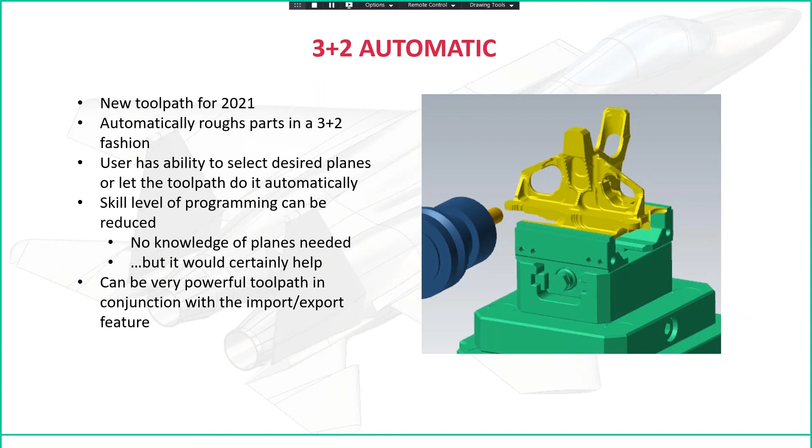Let's take a peek at some of the results we're seeing here. We're going to take a look at this exact model inside of Mastercam in just a second, but here's when I let Mastercam figure it out automatically for me. Looks pretty decent, but we have a nice big hunk of material here that we still need to remove.

Here is when I went ahead and gave it a little bit more planes. In this case, I just told it I wanted to come from specific planes rather than having Mastercam figure that out for me.

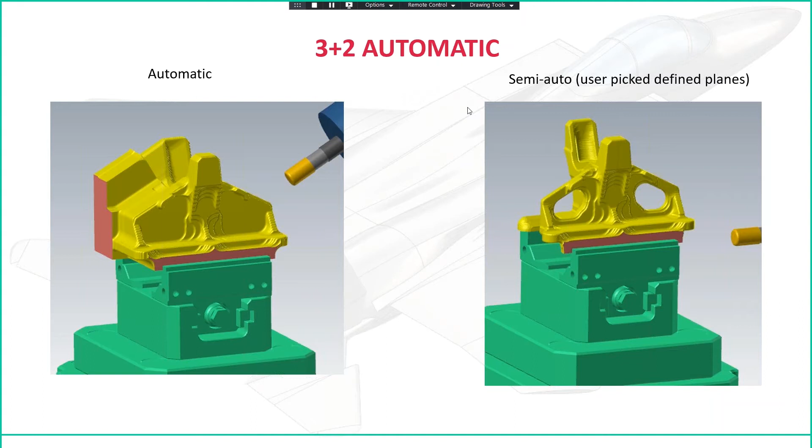The other usage we've been hearing for this too is you can use it as a rough shape to rough out. So if you're starting with a big chunk of stock, you can generate one of these models and rough out that shape instead - maybe as a better starting point to then go ahead and throw in some tools, knock down some more material.

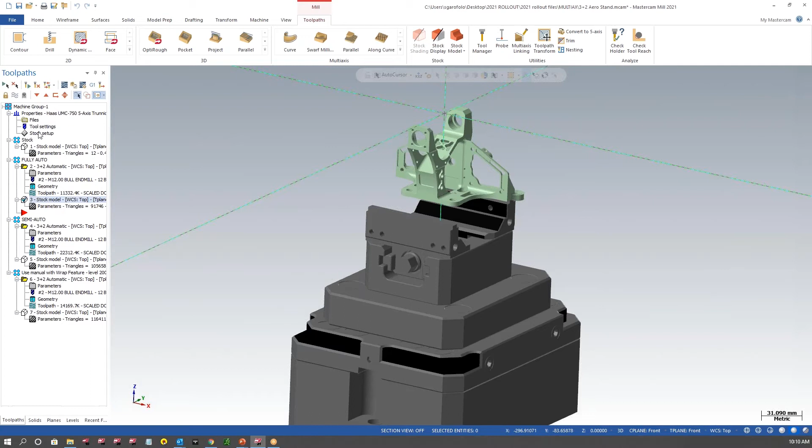The very first thing you need to do is either go into your stock setup and set up your stock there, or you can just create a stock model, which is what I did in this case. So this is what our stock looks like, just this nice block we have here. It doesn't matter whether you did that with a stock model or stock setup.

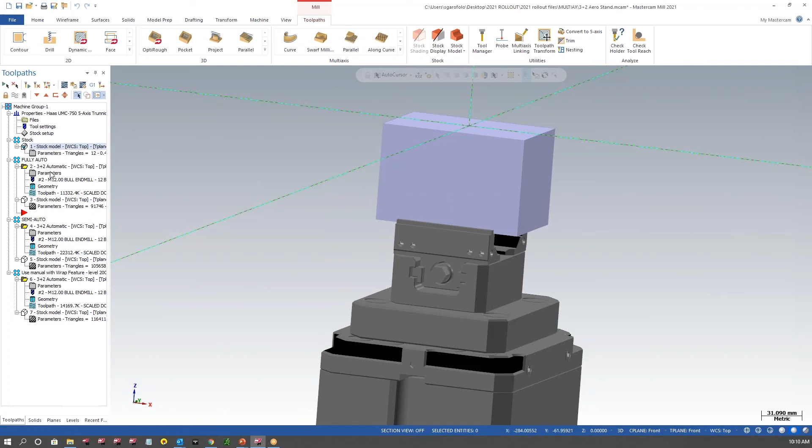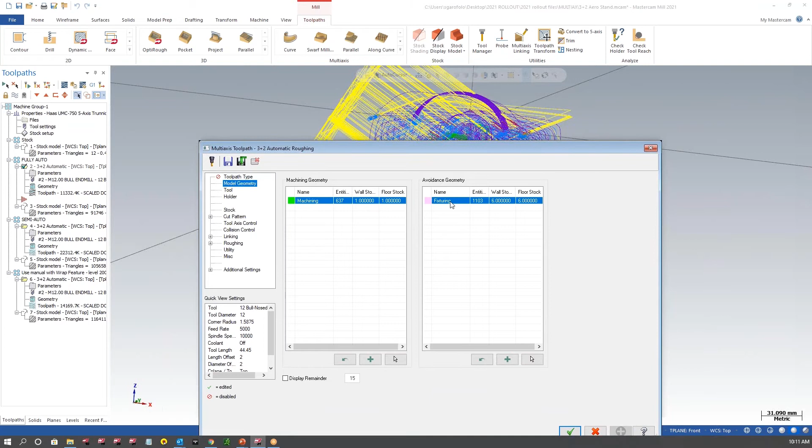After your stock is defined, we're going to go ahead and pop into the parameters. I'm going to go back up to the very first page here, which is model geometry. The one thing that should stand out to you guys on this page is that it looks exactly like a 3D toolpath. You select your normal geometry for machining and your normal geometry for avoidance, and it looks exactly the same as it would in a 3D toolpath. I think this is the only multi-axis toolpath that does that.

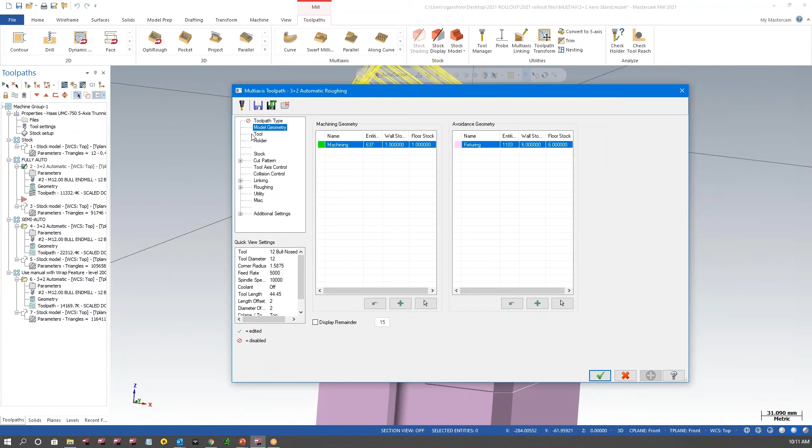But in this case, if you look on my screen here, what we're machining is the green model up top, and what we're trying to avoid are all these fixtures down below. Let's go to our tool page next, which is our 12mm bullnose end mill.

The page we do have to go to here is stock. So when I go to my stock page, I need to tell Mastercam what I'm starting with. In this case, I have it set to stock model, and I have it set to the stock model that I've created up here. You can also set it to job setup if you set up your stock in the stock setup page. So that's all I'm going to do on this page, just make sure I tell Mastercam what I'm starting with, and I'll move on to my cut pattern.

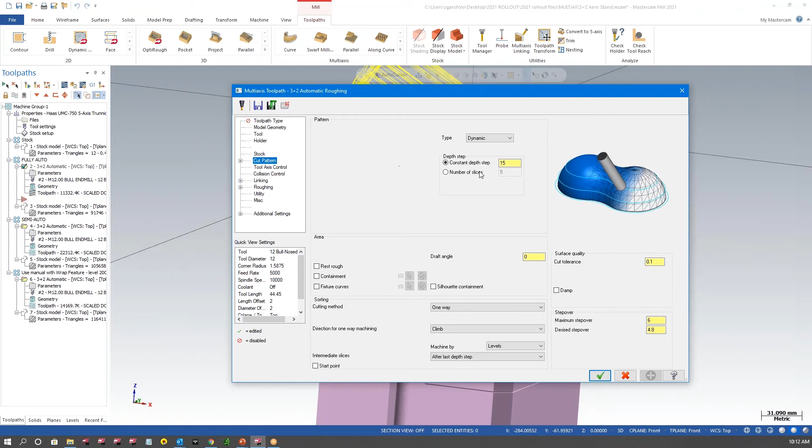And this is a pretty standard looking multi-axis page. Go ahead and set my depth step, how much I want to step down each time, and how much I want to step over.

There is one thing I wanted to mention here: the type is currently set to dynamic, and there's a bit of a caveat with that. That's actually not Mastercam's proprietary dynamic technology. It is something very, very similar to it, but Mastercam's own dynamic isn't quite yet into this toolpath, and there's a good reason for that. In coming revisions, we can expect to see Mastercam put their own dynamic in here, but this should work very similar to that still.

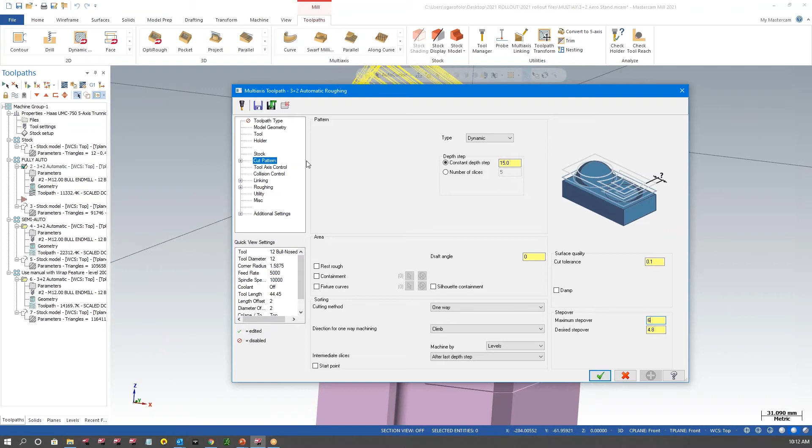All right, let's move on to our next page here, which is tool axis control. This is kind of the heart of this toolpath itself. This is what's going to allow Mastercam to either figure out the planes for you or allow you to go in there and tell it exactly how you want it to cut. In this case, we have it set to automatic, so I'm telling Mastercam to figure it out for me.

We have search angle increment, and this is used if you want to snap to specific angles, like 0, 15, 30, 45, instead of going to an angle of 22 point something or other. So how much increment do you want to snap your angles to? Max stock to leave needs to be larger than or equal to the value you have in the model geometry page. And max tilt range is how much this thing could tilt going from one of these planes to another. Currently we only have that set to 90.

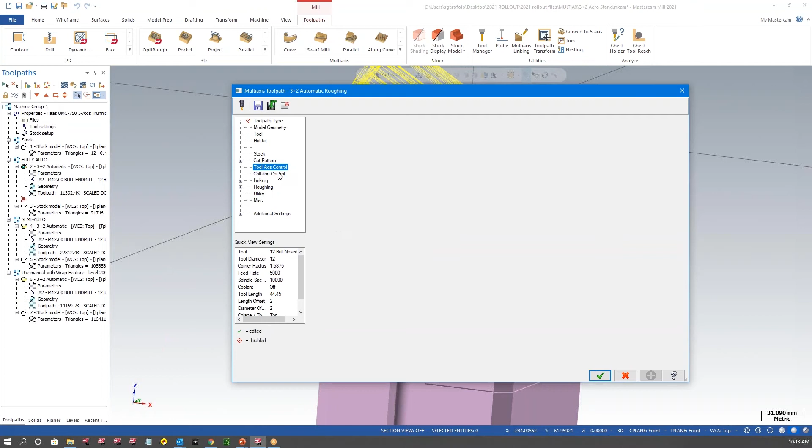Other than that, with this toolpath, there's nothing too earth-shattering. The next page is collision control, and this has clearances for your holder, shank, and shoulder, just like many multi-axis toolpaths would. Then the linking page is pretty standard too. We have clearance area set to plane, and that's the only thing you have the ability to set it to in this case. It'll always retract in the current plane that you're doing your machining.

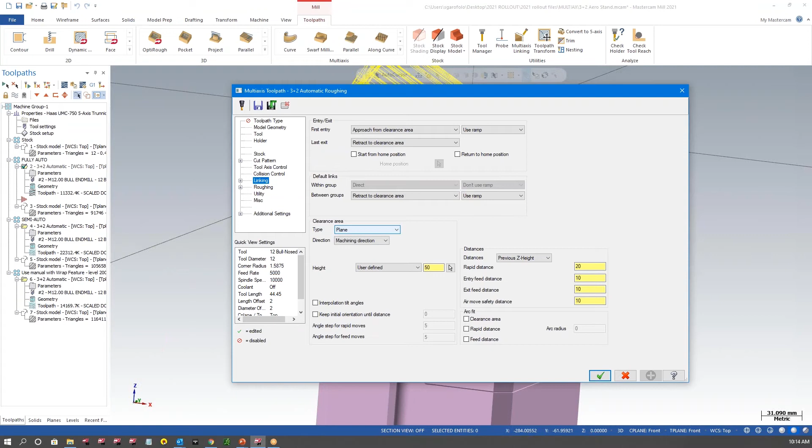All right, let's take a peek at this one. I'm just going to hit the red X so I don't have to wait for it to regenerate again. And I'm going to play it for you guys in backplot. I know it might look a little jumpy on the online session, so I'm just going to forward it through a little bit for you guys here.

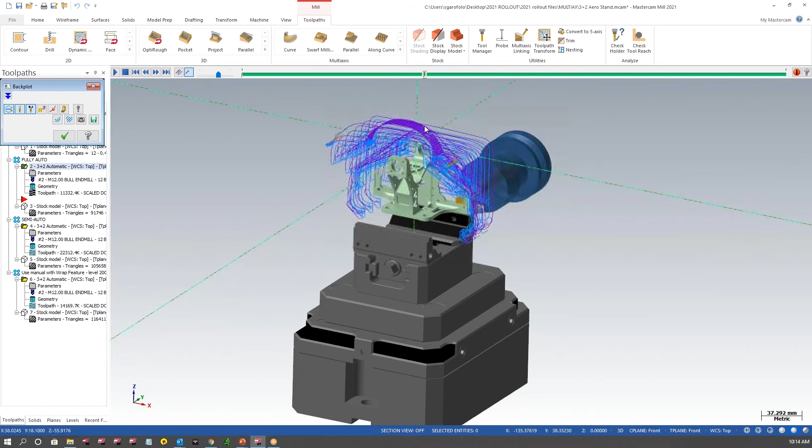As we can currently see, it's milling from, let's say, the back plane. And after it's done with that, it's going to transition to a different plane, and we'll get there. So now we transition to this 45-degree plane, and we're going to continue to machine in this plane. I'll just slide it all the way through here.

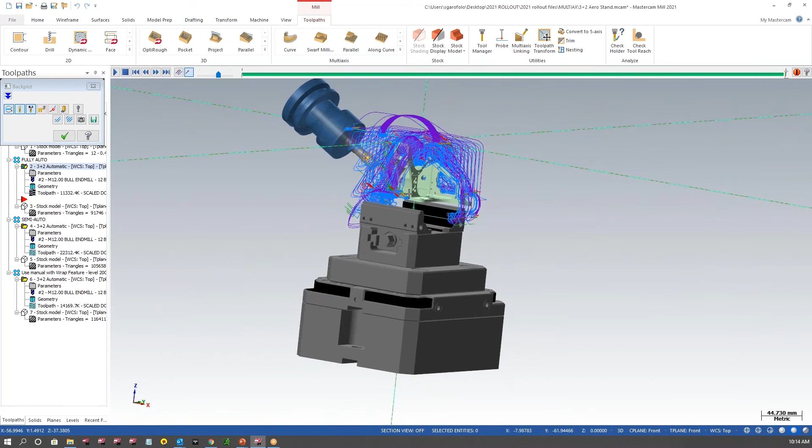One thing that I noticed right off the bat is it looks pretty decent, but the fact that I can see straight through to my model there lets me know that we missed a big chunk of material.

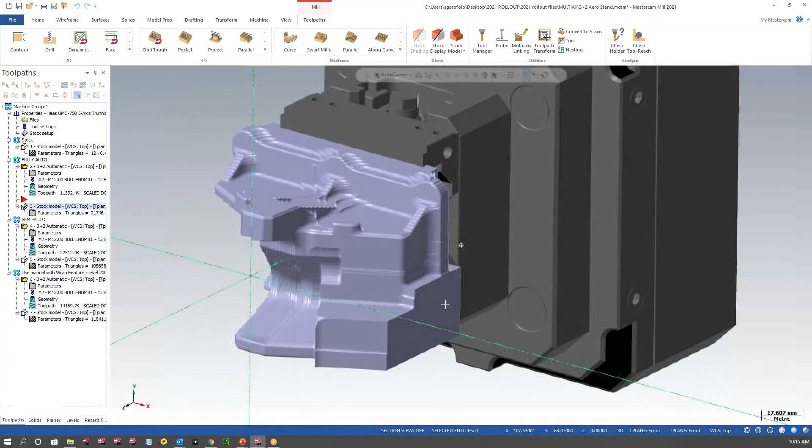All right, so that's what you run with automatic. This is what it ends up looking like. It's the same model that you guys saw up on the screen there. You end up with that nice big chunk of material. So let's see how 3+2 automatic works when we go ahead and give it some input.

I'm going to click on the next one here down to semi-auto. I'll go into the parameters and show you how this works. The only difference of this toolpath is everything's set up exactly the same. The only thing that's different is the tool axis control page.

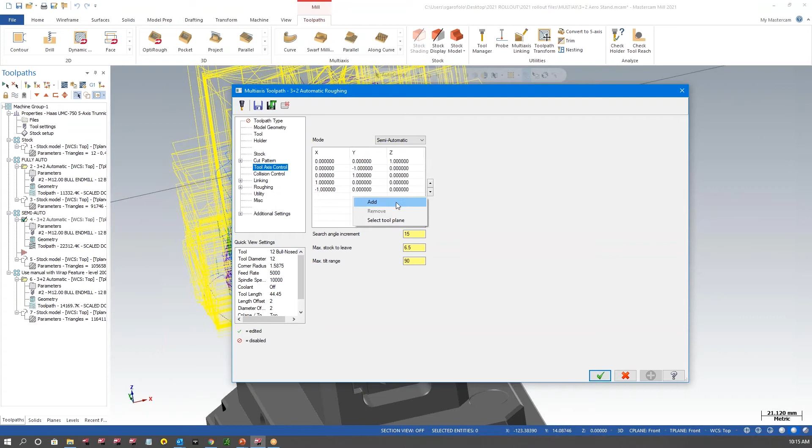We previously had this set to automatic. It's currently now set to semi-auto. So what we're now allowed to do in here is define the planes that we want 3+2 to machine in. So in our case here, if I want to add a plane, I can right click and either select add and type in the vector, or go here and say select tool plane, which for me is much easier.

When you go into select tool plane, you have a bunch of options, as you can see on this little select view. You can select either top view, front, side view, isometric. You can grab a named plane, which would include any planes that you may have created yourself. Or you can do some things on the fly here.

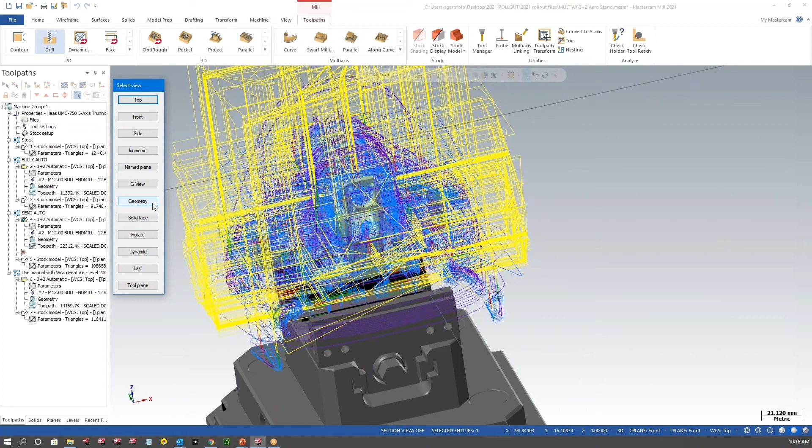We can do a geometry, solid face, and simply click a fixture or your model to generate a plane that you want to machine in. So in our case, I'll do something like solid face and turn off all these lines. Perhaps I want to go ahead and click on either a face of my fixture or a face on my model, and obviously it has to be a flat face.

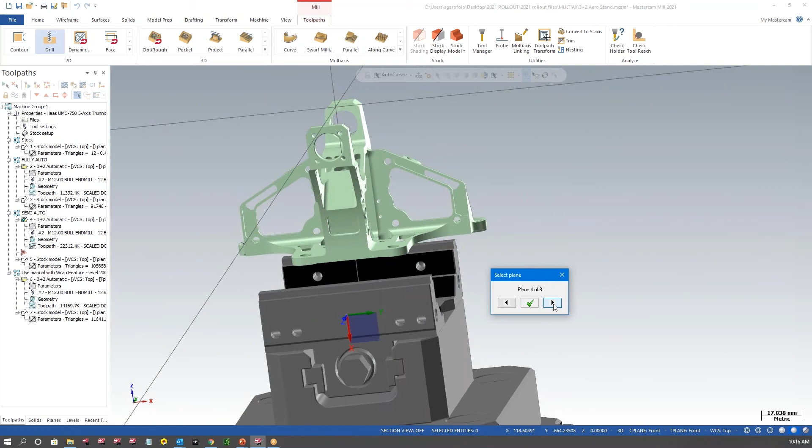I'll click this face on my fixture, and just like you could for normal planes, you can then rotate this thing around for how you want it to tilt in your machine. I'm going to go with plane 4 here, Z coming straight out of that. And then I've added that as a plane I want to machine in.

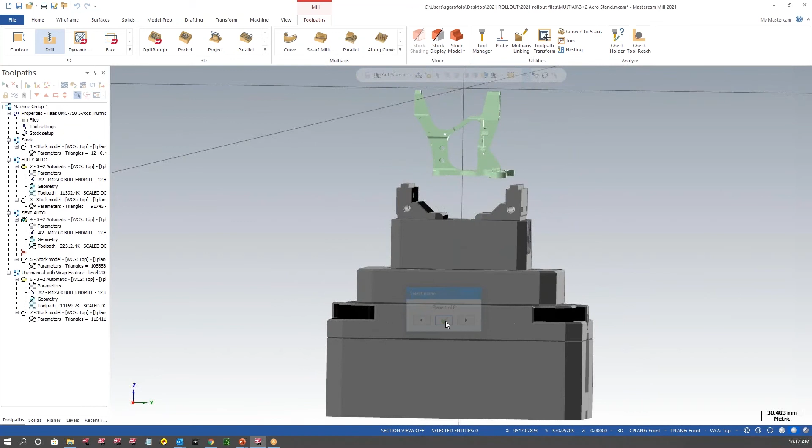Go ahead and add another plane if I would like. Do the same thing. I'll select solid face and rotate to another solid face here, and I'll add that as well. So you can add whatever faces or planes you would think would be most efficient to machine your part.

I'm not going to hit the green check. I'll hit the red X again so I don't add those in. We'll see what I did here. I think, once again, I came in from almost every plane, like 5 sides. I think I came in top, front, back, right, and left. And I think I could have easily omitted right and left and still got really good results.

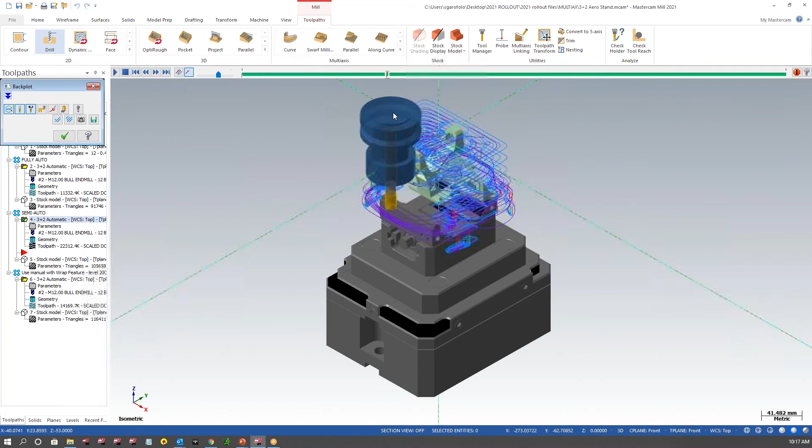So if I play this thing through, you'll notice it does all those things. It starts from the top, and then it will end up transitioning to a new plane coming from the front. And the one thing you'll notice if you're watching this is it's not spending a whole lot of time in those front and back views.

So it's doing rest machining. It's aware of what it's already cut. It's not recutting the entire model over again.

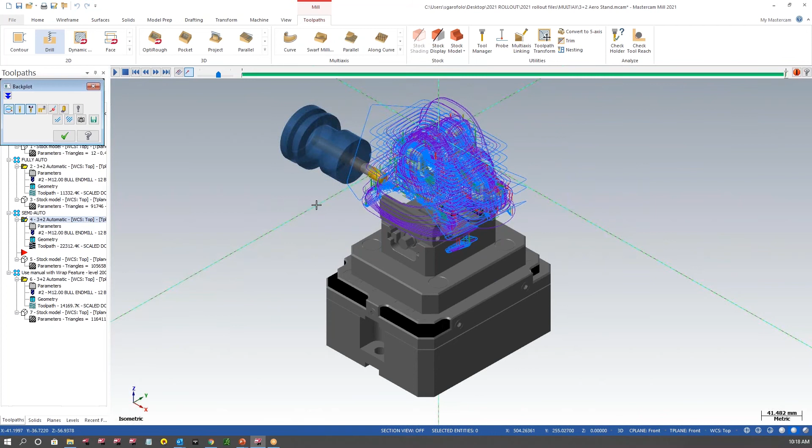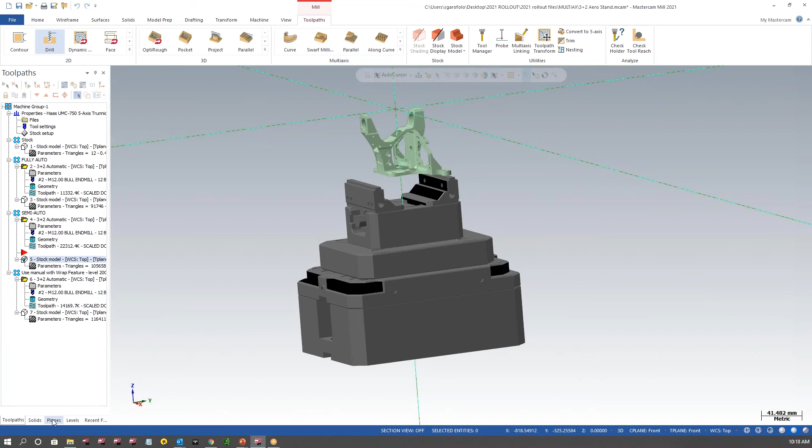One more thing I wanted to show you is the wrap feature for bounding box. So if I go into my levels, I already have this wrap created. I did the minimum volume for this one, and you get this kind of funky shape here. Once again, perhaps if we started with a really large piece of stock, this might be a good intermediate step for us. Rough it down to the shape and go from there. So we used this shape for our last toolpath.

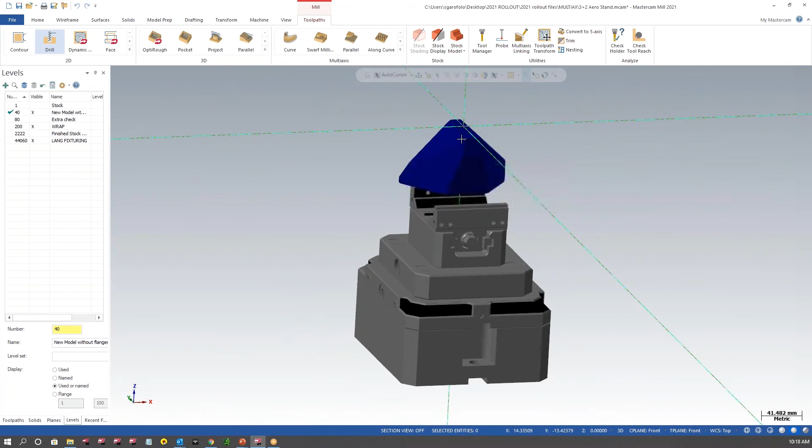We went ahead and roughed this shape in, and I'll just show you the stock model. Once again, just a nice little feature. I think they've tweaked bounding box for like the last 4 revisions, so coming out with some really slick stuff for it.

All right, let's head back to the PowerPoint here. There is one more thing I wanted to talk about with 3+2, that is.

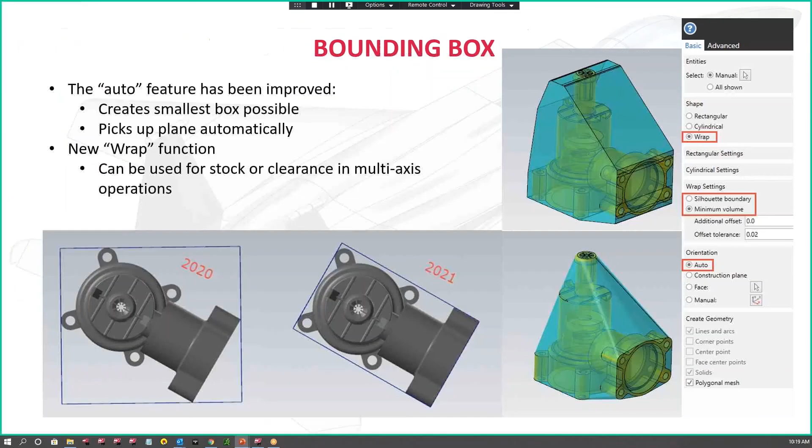Okay, so I did say that it doesn't use Mastercam's proprietary dynamic technology, and I don't know necessarily the limitations of what's different in those two options. But what can we do if we wanted to use that Mastercam's dynamic technology? In this case, what I did is I did something very similar to 3+2 automatic roughing. I came in with a dynamic OptiRough, which is one of my favorite toolpaths to use.

I came in from this and I attacked it from the top view. So I entered right down into this pocket, as well as the outside of the part as well. And then what I did after that is I took that and I created a stock model from that. So pretty much I had a stock model that showed me everything that first dynamic OptiRough removed.

And then what I did is I created another dynamic OptiRough that came in from the front view, and I used that stock model as my stock. So Mastercam knew exactly what had already been machined, so it knows exactly where it needs to cut. Just food for thought, if you wanted to try that out, it works very well. And once again, it uses Mastercam's proprietary dynamic technology.

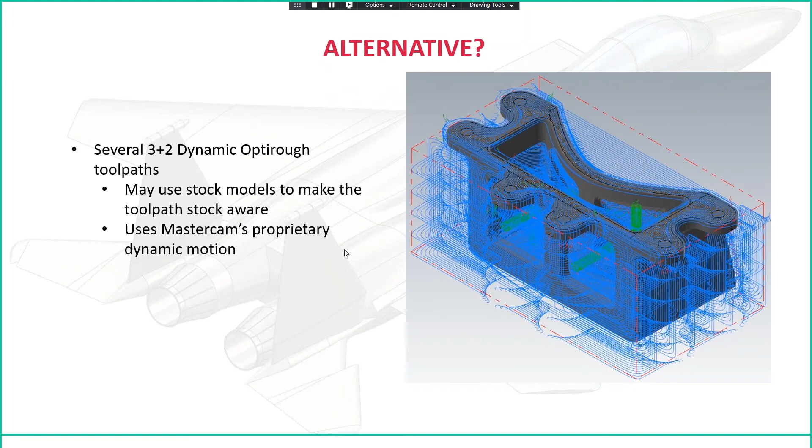Move on to the next thing here, which is adaptive depth step. Rotary Advanced is one of those toolpaths where I've always felt like I wanted more control over. A lot of times it would be cutting in places and not going down to the floor that I wanted to cut to, even though I specified a decent depth step. So what they've come up with in 2021 is something called adaptive depth step, which makes it so Mastercam will always hit the flat features that you see on your model.

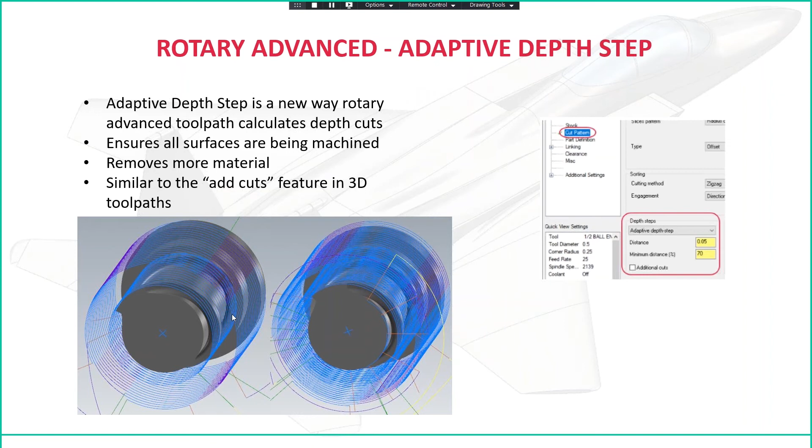They came out with these—they gave you the ability to define these finishing tools in Mastercam in a previous revision: oval form, barrel form, lens form tools. And they didn't give you great ways to use them.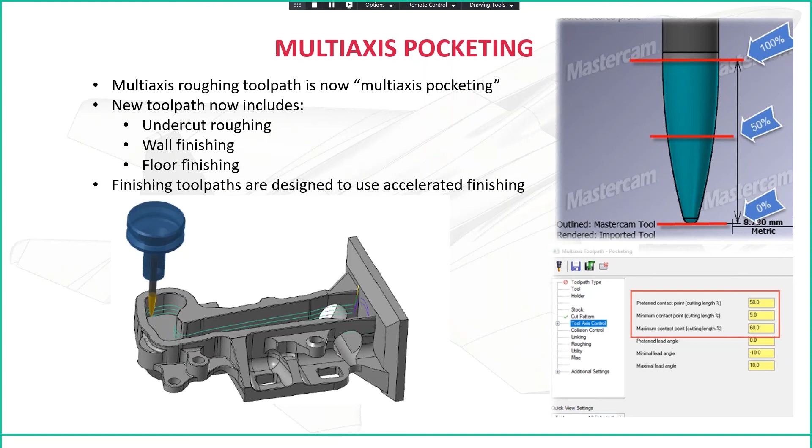Okay, so let's take a peek at these tool paths. Let me load that part up for you.

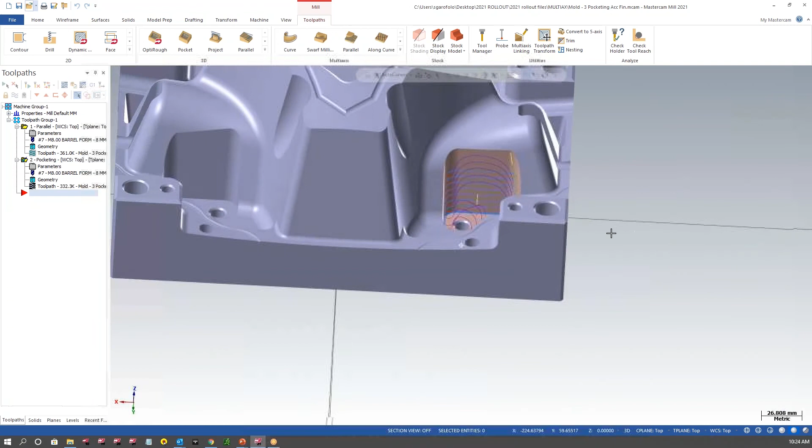So I already have this one written. Let's go through the parameters and talk about exactly what we did here. I'm going to go into the tool first—let's take a peek at what that looks like. It's an oval form tool. Once again, we're going to try to use as much of this as we can, probably around 50%.

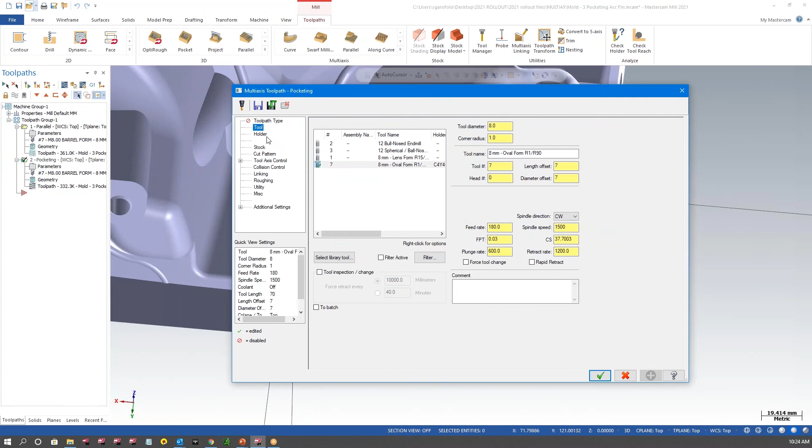Moving on, I'm going to go to my stock page, and I don't actually have to configure anything here for my stock. I'd definitely suggest configuring something when you're doing roughing, but for finishing operations, we don't have to throw anything in this page.

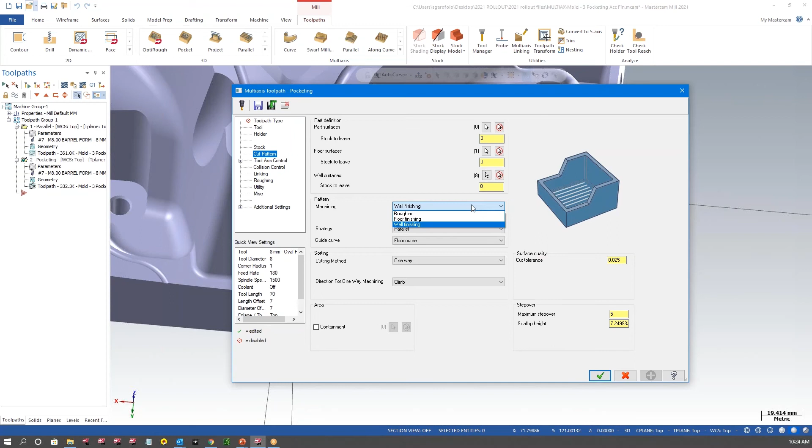Cut pattern. If you're familiar with multi-axis roughing, this looks very similar still to how that tool path is usually configured. The only difference we've made so far is switching this dropdown from roughing to wall finishing. In this case, I have my one floor surface, as this floor down here with the two holes, and then the wall surfaces are the walls all the way around this part—all these bronze looking walls here.

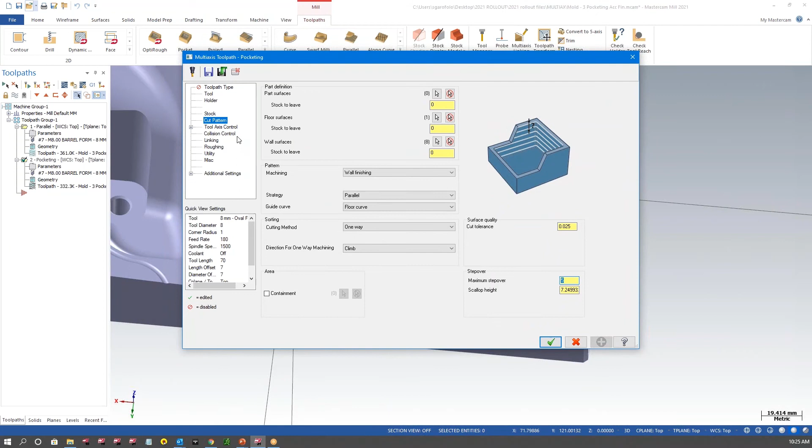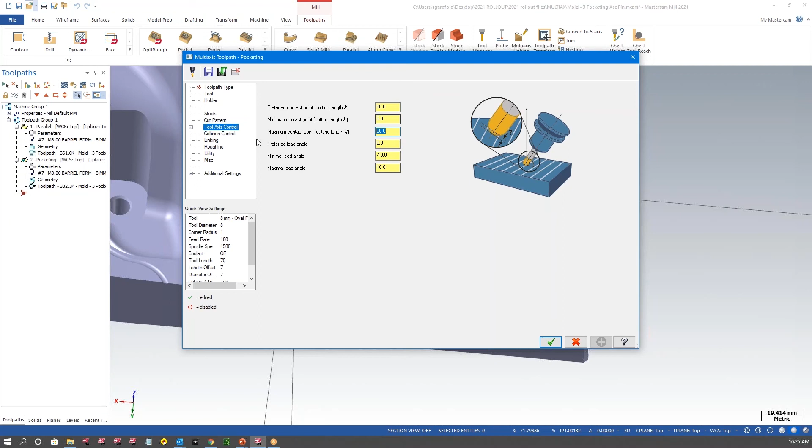Go ahead and set my step over to 5 millimeters. Next page is tool axis control—this is the page we saw on the slide, where we can say I want to try to cut with 50% of the flute length of this tool. Minimum is 5%, maximum in this case is 60. We'll see how that actually works out when we play it through in backplot.

Collision control, nothing too crazy here. In linking, there is something new.

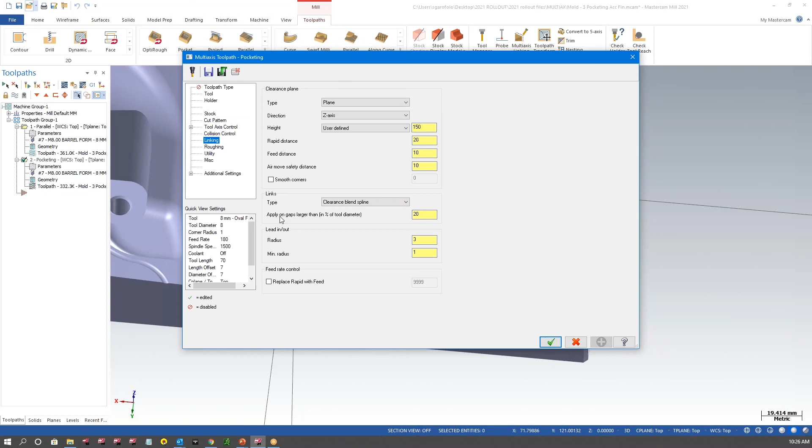There's this new clearance blend spline, which works very similar to a lot of tool paths. You could say applied on gaps larger than, and give it a certain percentage of your tool diameter. When it exceeds this, it creates this nice clearance blend spline. I'll also hit my dropdown and do a retract clearance area, which works just as it normally would—retract to your normal clearance area, drop back down, and start your next pass.

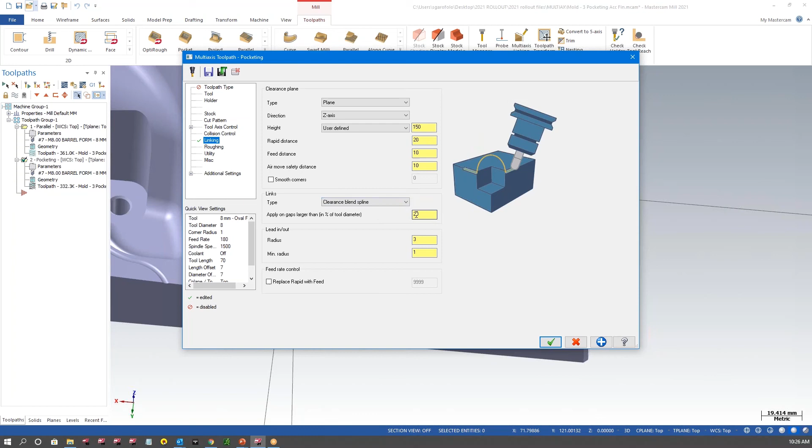So clearance blend spline, we're going to take a peek at that once we play this thing through. Really, other than that, I don't have anything earth-shattering to add here. Let's take a peek at this thing.

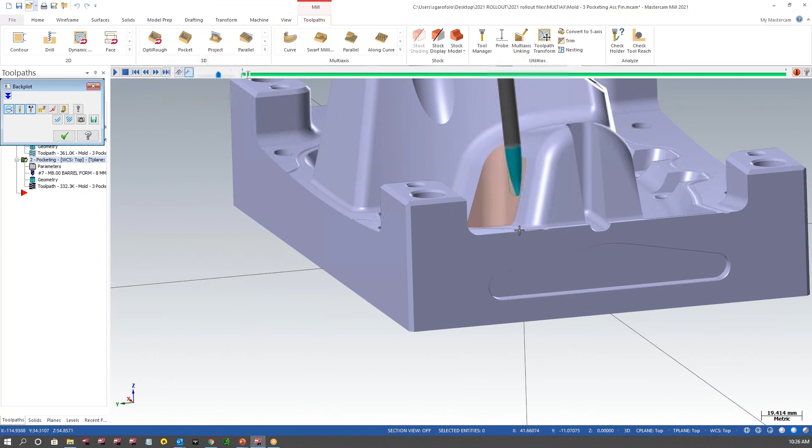It might be difficult for you guys to see. I'm going to try to spin this and get it in a good position for you guys to take a peek at. Let me get this thing in position first. Let me zoom in and rotate.

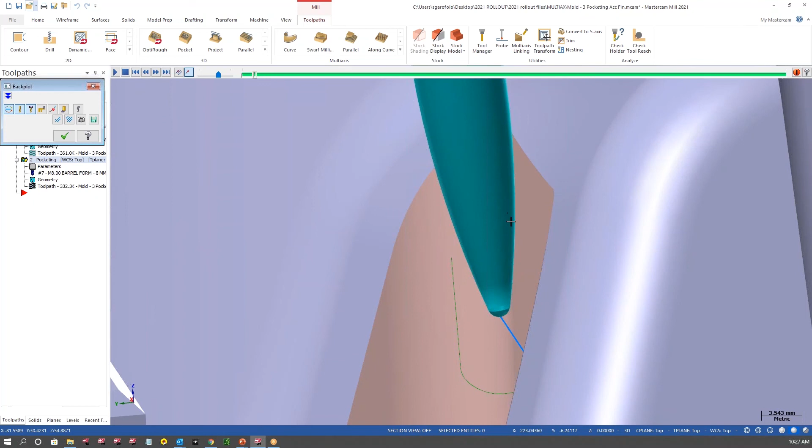You can see the whole point of accelerated finishing tools is we're not just wearing a tiny spot on our ball end mill as we're trying to finish this face. Instead, we're wearing a good chunk of that actual tool. As you can see there, we got a good fit—about 50% of that tool is contacting at one time. Then we're just going to continue to work our way down these faces.

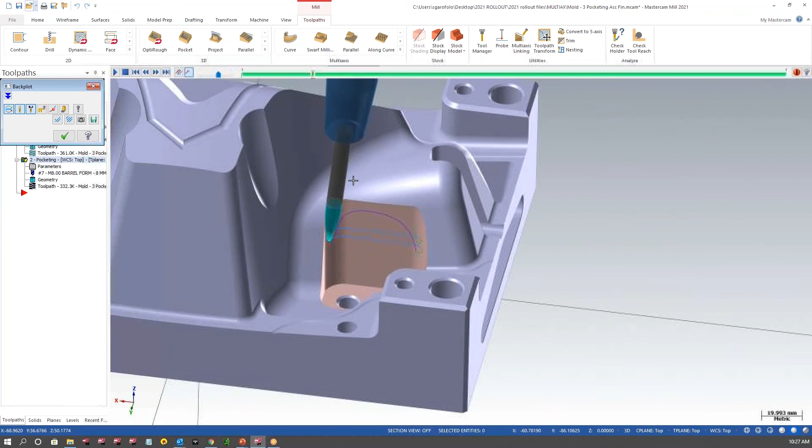And if you saw that move right there, there's our nice clearance blend spline. I'm going to rotate you again so you can get a better look at that. If I play that thing through, instead of retracting all the way to our clearance plane, we'll stay inside of this already roughed pocket. We're simply transitioning from one finish cut to the next—it's a nice arc move.

Okay, this thing's going to keep going. I'll just speed it up a little bit. And as it gets down towards the bottom, it will start taking passes all around that bottom wall, and we'll finish this entire pocket.

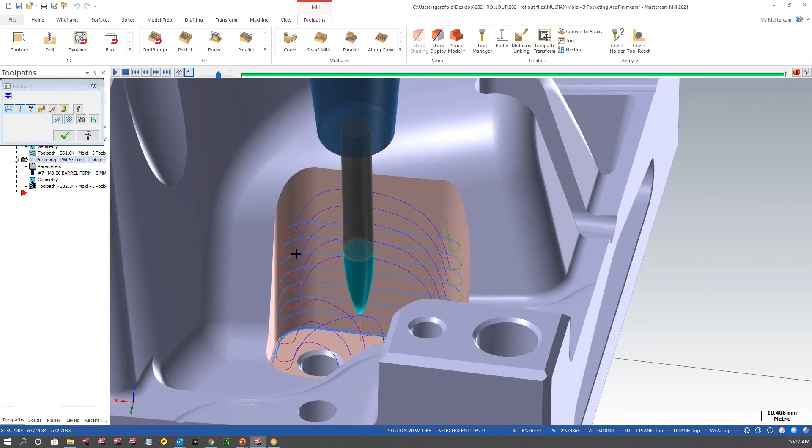Personally, I think they're on the right track with this one. I think this is a great idea. The reason I say that is because a lot of times when we're teaching classes here, especially for 3D, we'll do a surface rough pocket or an opti rough, and we'll rough out this whole cavity or this whole part. And then the question we usually get after that is, can we switch that now to finishing? It's like, well, that would be really nice if we could just flip a switch and make that happen. And I think they're on that sort of track, right?

So we can go ahead and create a pocketing operation for multi-axis. We can rough out that entire pocket and then copy paste that operation, what have you. And we can go back in and we can switch things to finishing. Now I want to finish the walls, I want to finish the floors. So I think they're taking a good step in that direction.

What you would do in this case is you'd create a line up by where that retract is. You'd draw a 45-degree angle line, and maybe you'd want to do one down below, currently where the flute of the tool currently is, just to make sure this thing always stays at that 45-degree angle. And when I was doing some cutting, we would always notice that we'd have some wobble - it wouldn't be staying right at 45, it would be around 45, and it might be tilting a little bit as it's cutting.

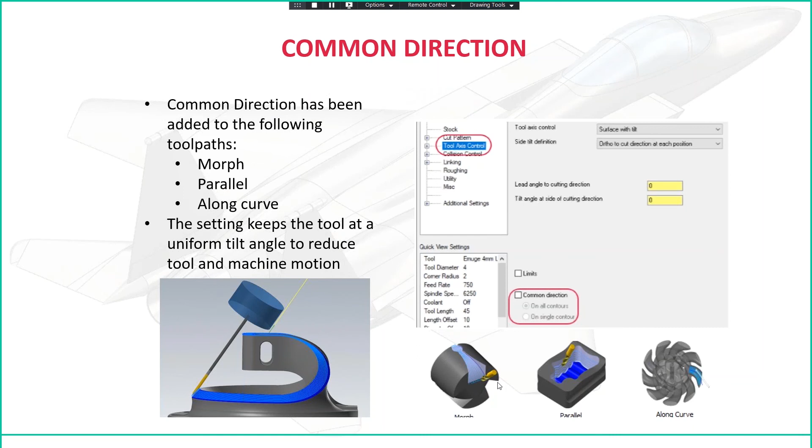As we know, it would be much more beneficial to simply lock our axes in place. It's more rigid that way, and we can just walk our way around our part. That's what common direction will do for you. If you set yourself that line to a 45 and say common direction, it's going to keep you locked in at that 45-degree angle as you're going around your part and machining. So what they've done now - this has been in the system for years - they've added it now to MORPH, parallel, and along curve toolpaths.

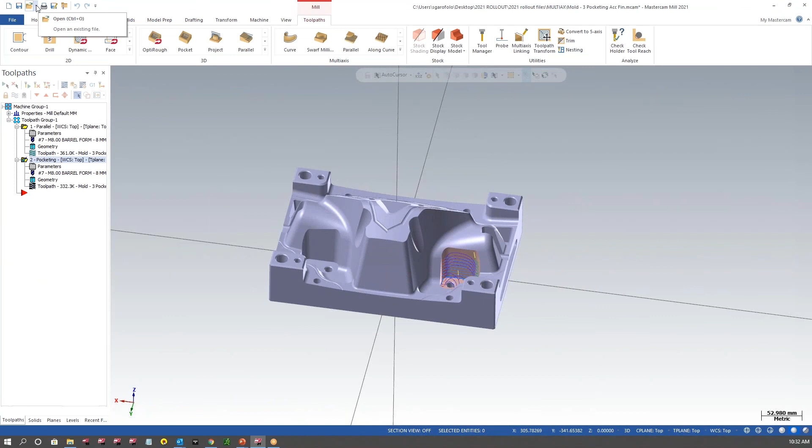So let me show you what I mean. And I tried to get that nice model that they had there up on that slide, and I couldn't do it, so you guys are stuck with my modeling skills.

Okay, so here's what we have. Almost exactly like the model we have on the screen, except not really at all. But we're going to go ahead and try this morph toolpath here.

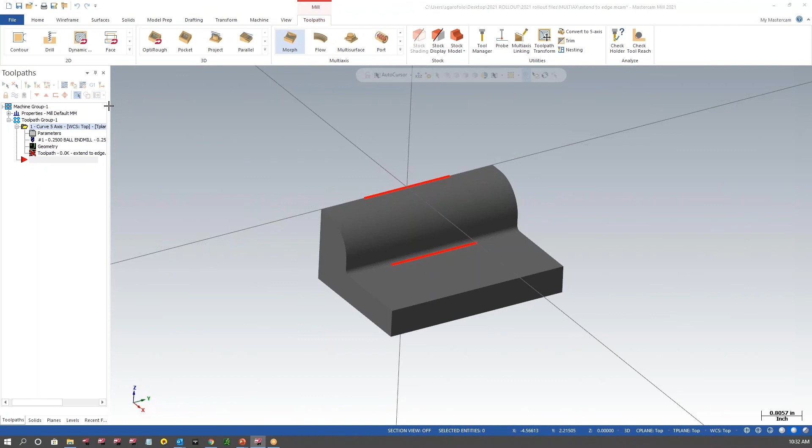If you've never used morph before, grab a tool. How it works is you select 2 pieces of wireframe that you want your toolpath to morph between. These could be any shape, but in our case it happens to be really easy, just 2 straight lines. I'm going to make this my from curve, that's where my tool is going to start, and my pattern to curve, which is where the toolpath is going to end.

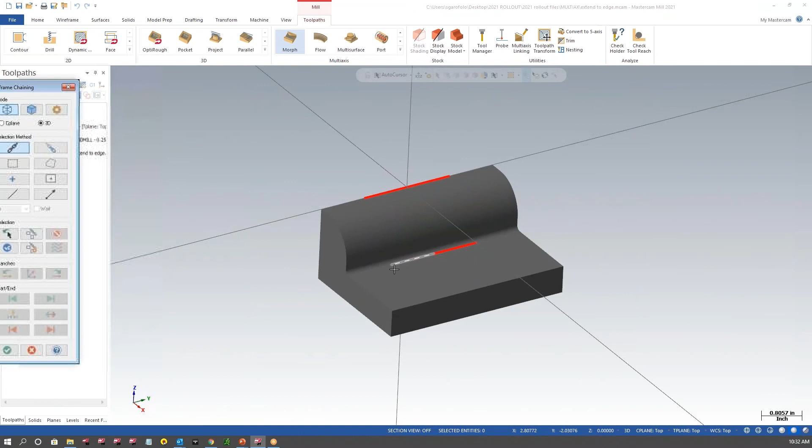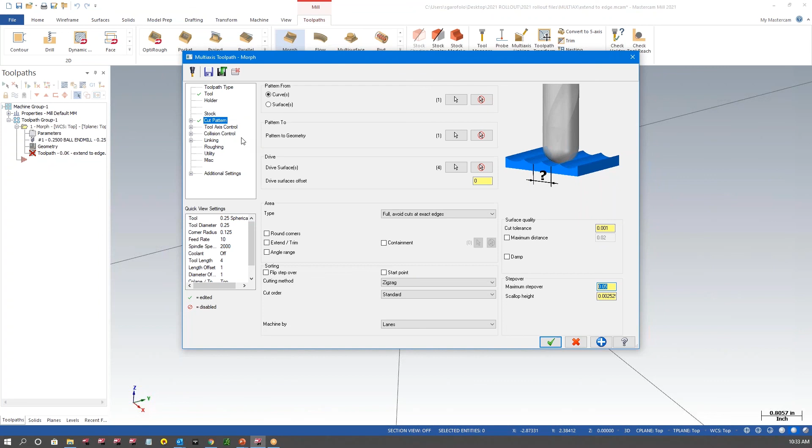I'm then going to go ahead and select my drive surfaces, what surfaces I actually want to cut. All I have to do here is give it a step over. Currently I have it set to zigzag, and that's fine for what we're doing. Let's go to the tool axis control page.

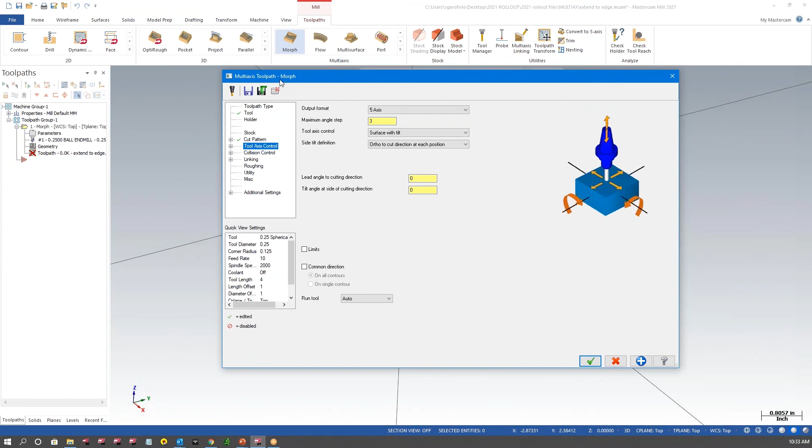I did want to make a mention in here. If you guys don't use morph a lot, first of all, it should be one that you use for multi-axis. It's a great toolpath, but my suggestion is also to use it for 3-axis stuff as well. Morph is one of my favorite surfacing toolpaths. I'm a big fan of blend, and morph is essentially blend on steroids. This thing has a lot better results when it comes to tool contact. I would say if you're ever having trouble getting your blend to work, give morph a try. It's a really powerful toolpath, not only for 5-axis, but for 3-axis as well.

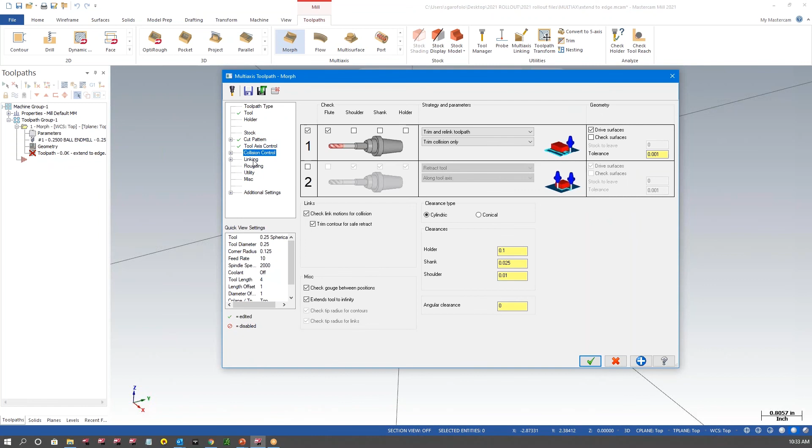All right, there's nothing crazy in here. I'm just going to go ahead and hit the green check and generate this toolpath.

Let's see what it looks like without having that box checked. So this is what you end up with. Let me zoom in on an end here so you can see it a little bit better. You can see as you start to get out towards the edge beyond those lines, your toolpath begins to fan out, and you can see the big spacing between these passes. We're going to have some big scallops in these areas. So let me zoom back out here.

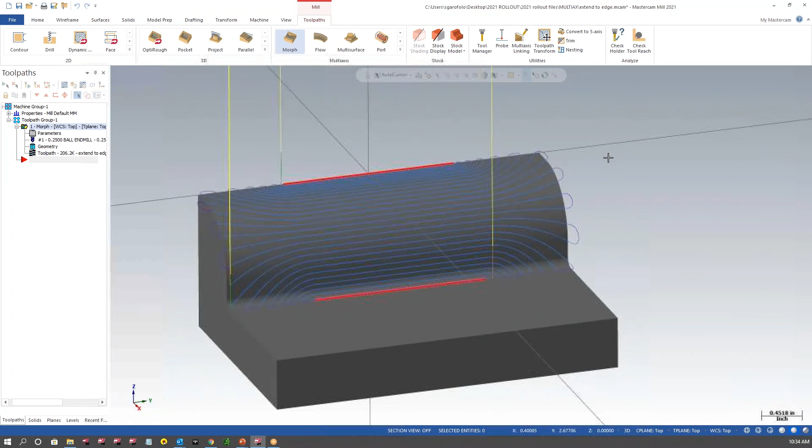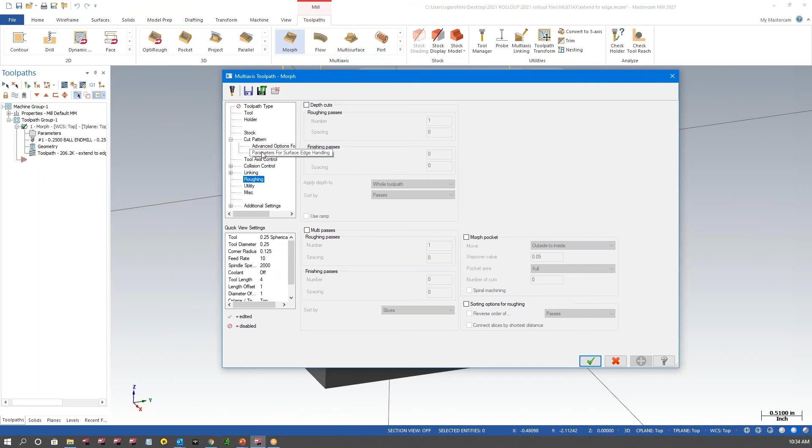We'll pop back into the parameters of that toolpath and let's go ahead and make that change. Where this checkbox is found, you're going to have to hit the plus next to cut pattern. That'll expand out some options for you. Now we can go to parameters for surface edge handling. Extend edge curve, let's give that a check. We'll regenerate our toolpath.

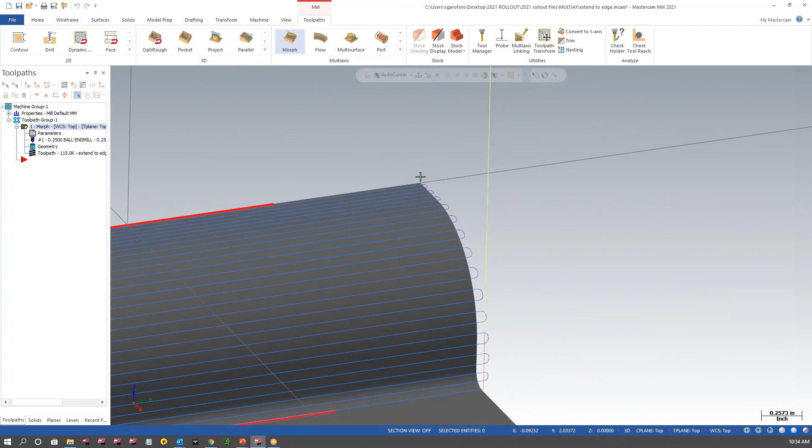I'll zoom in on that same section for you again. Once again, what it does is it acts like your wireframe actually went all the way to the edge. So now we get these beautiful straight lines all the way through, and that's what we were looking for initially as well.